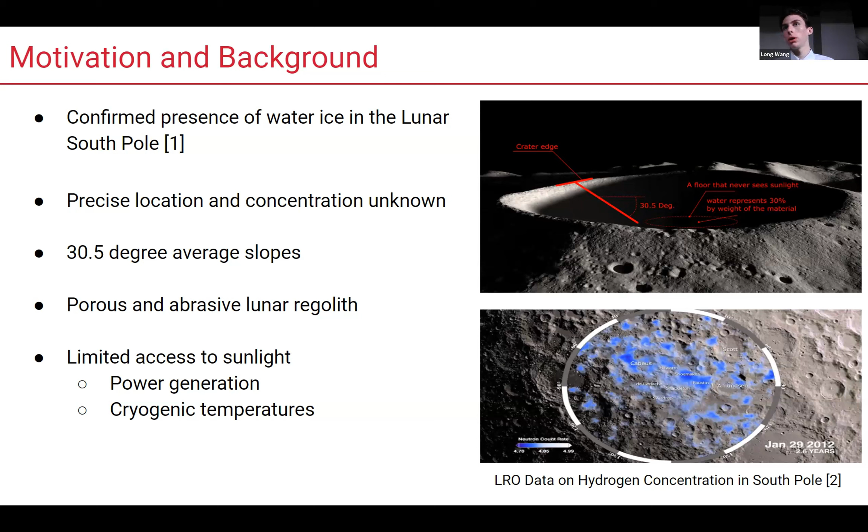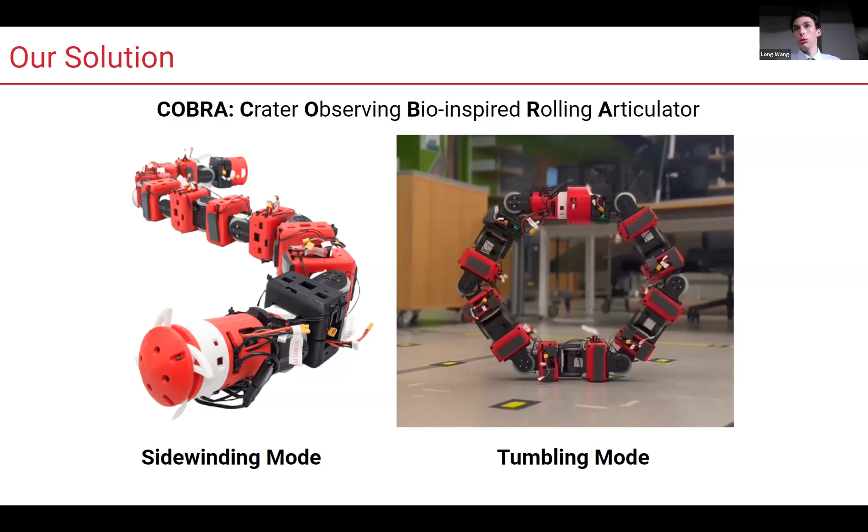So we present our solution, COBRA. COBRA is a snake robot that has two main modes of locomotion. The first is sidewinding mode, where it mimics a snake traversing through a desert, distributing its weight over the surface area on the sand so it sinks less, sliding in a horizontal motion. The second is tumbling mode, where the head and tail latch together, and with the jolt of the center of mass on top of a slope like a crater, it can tumble down like a tire. This is very good for power because it uses little to no power at all, just harnessing gravity to tumble down.

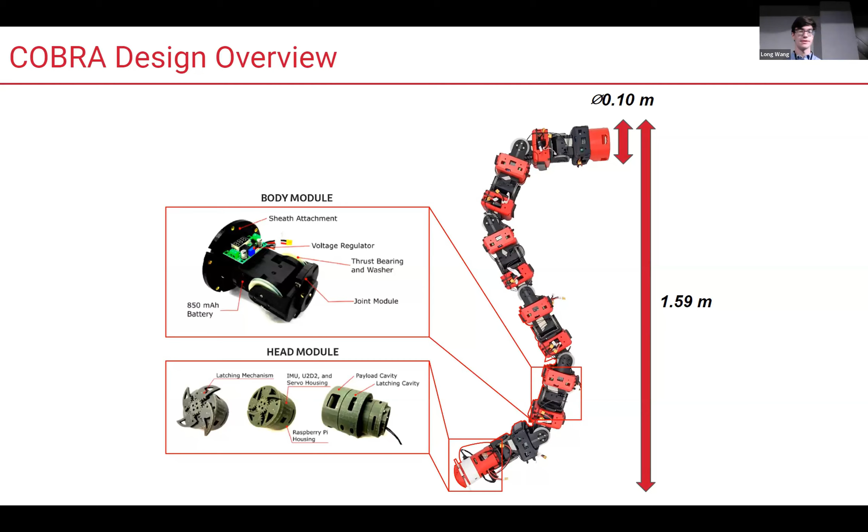To talk more about COBRA's design, we have 11 identical joint modules, each with 1 degree of freedom, and each module contains an actuator, a battery, and a voltage regulator. We also have thrust bearings on either side of the actuator to increase our stress capacity, and a unique head and tail module. In the tail module, since we're aiming for the lunar South Pole to look at ice concentrations, we house a scientific payload. We also have a unique head module containing all the onboard computing, its own actuator, voltage regulator, and any necessary cameras or other sensors.

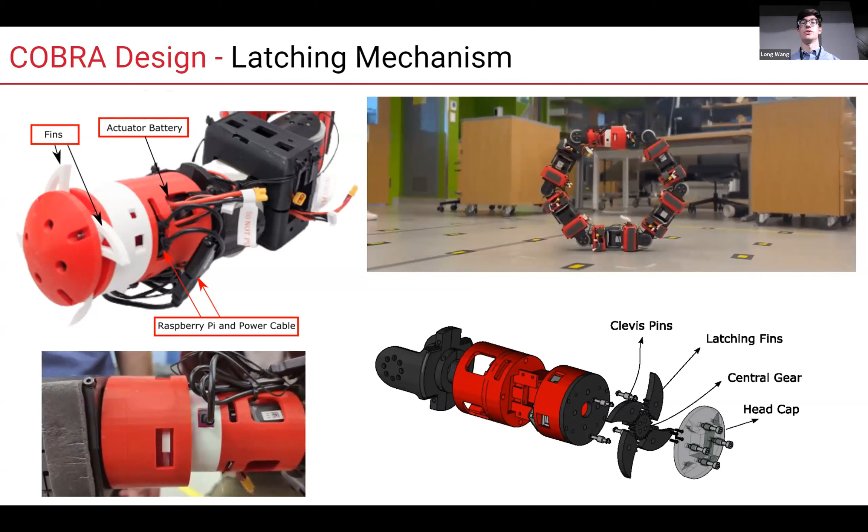To talk about how the latching mechanism works, as you can see in the diagram, we have an actuator connected to a central gear with 4 latching fins. These fins connect to the female cavity on the tail module, allowing it to mechanically lock in place, which prevents any disruption as it rolls down the crater.

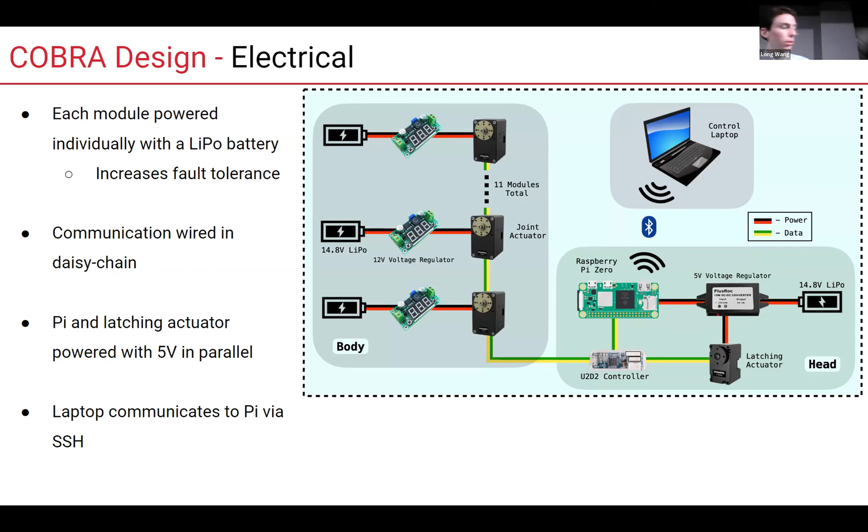After we built the system, we wanted to do some testing to verify that all of our locomotion concepts are actually feasible.

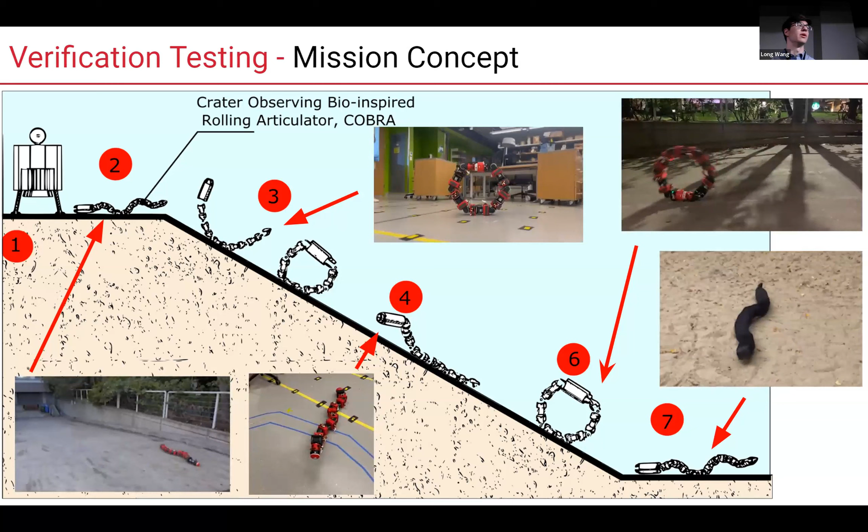This is the mission concept we designed, showing everything needed to get from the lander on the surface of the moon to the bottom of the crater where the ice concentration is. We sidewind from the lander to the edge of the crater, connect head to tail to start rolling down the side of the crater, and at any point on the crater wall we can stop and do scientific measurement using our tail module and payload. Then we reconnect, go down to the bottom of the crater, and sidewind until we run out of power, taking scientific measurements the entire time.

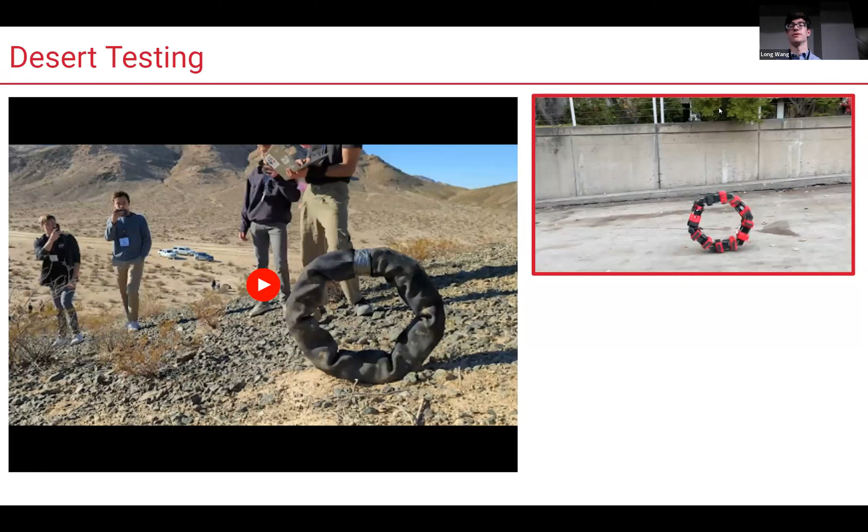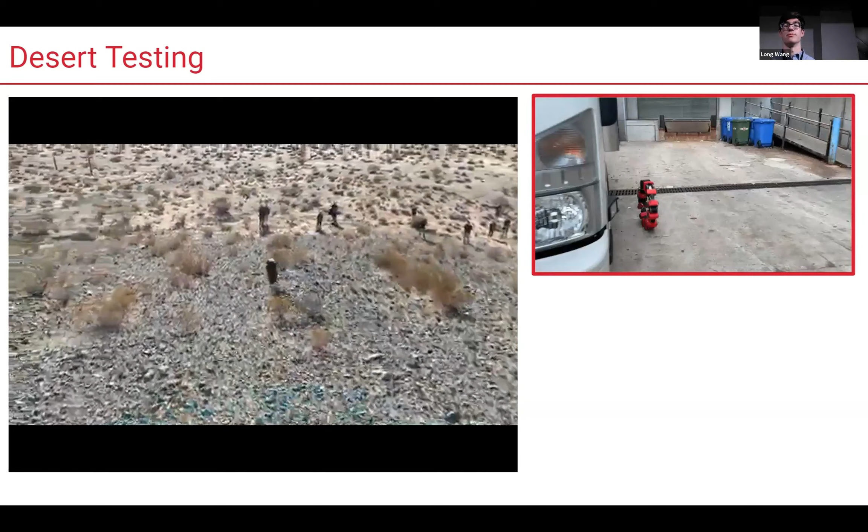Moving away from the lab testing, this is some larger-scale testing which proves some of the tumbling concerns we had and stability. As you can see, even on up to 30-degree slopes, we're still very stable and use very little power and are very efficient.